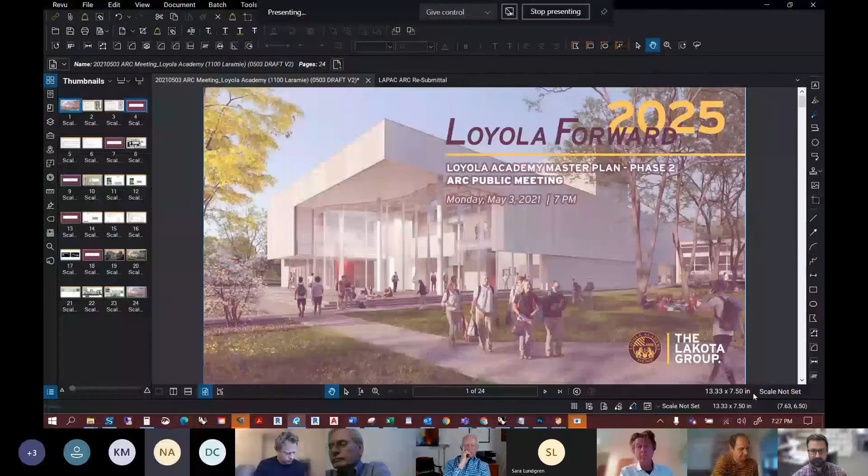Not sure who's going to be kicking off the presentation for the applicant, but they could introduce themselves. That would be great. Hi, my name is Dennis Stonquist. We've been in front of you before and glad to be back. Thank you everyone for the time tonight. I may not have wind or trains in the background, but I do have 2 kids and 2 dogs, so I just want to put that out there right now.

I am grateful to be here with Sara Lundgren, who is from Krueck Sexton Partners, who is our lead architect. We have made a few very small modifications that she will clearly explain to you, as to why and why we think they work.

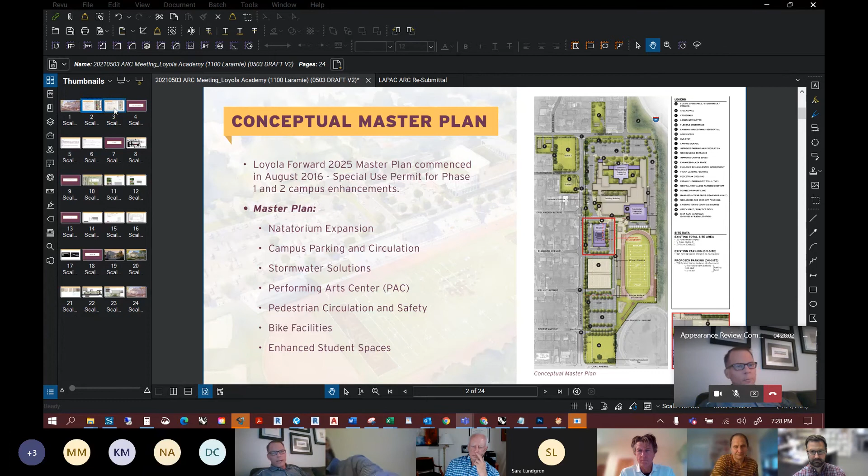We've started construction with our foundation permit, and there is now digging in the backyard in the quad section at Loyola Academy, with our plan to be open in the fall of 2022 for the 2022-2023 school year, with a theater and performing arts center that we believe is key not only to our experience, but the beauty of our campus. It is going to make the quad more usable. We've explained this before, but this is something we need on campus, and we believe it will be a bright spot for the Wilmette community with a 550 seat theater.

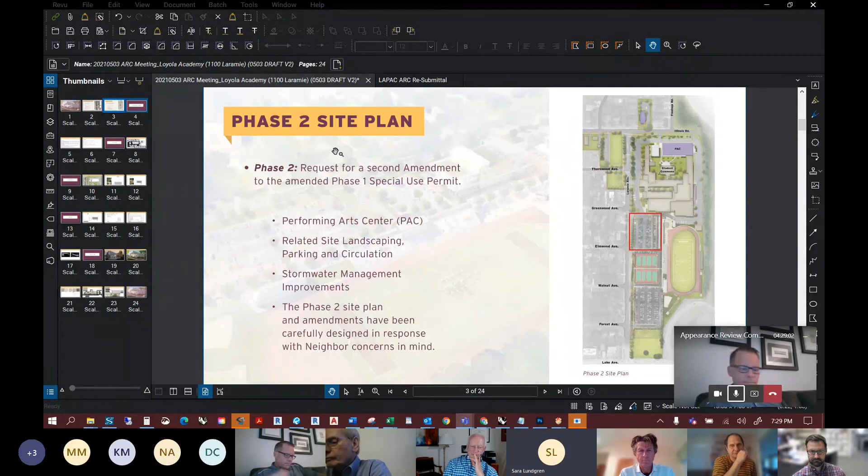I will turn it over to Sara Lundgren, who is now a partner at Krueck Sexton Partners. Congratulations, Sarah, and she will lead you through the specifics. Thanks, Dennis. Thank you everyone for having us present today some of the changes. We really appreciate your time.

Regarding the questions, these came through in the review of the building permit. Quickly, just to go through these, and then I can show them on a site plan and also in some renderings and various images that we've created. There were some changes to the stairs at the terrace level upon entry, both from the quad and from the drop-off. There was a change to the hardscape and an introduction of some aggregate. There was a change to our mechanical plant, which we can show on the plan, and a change to the fencing around it.

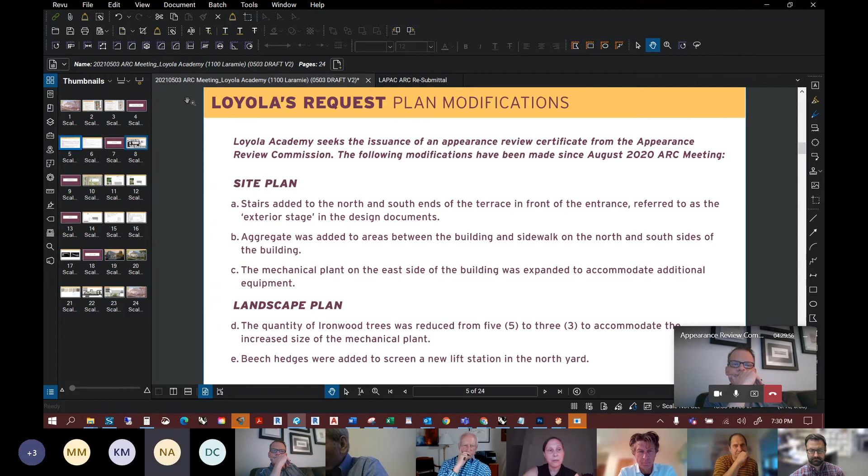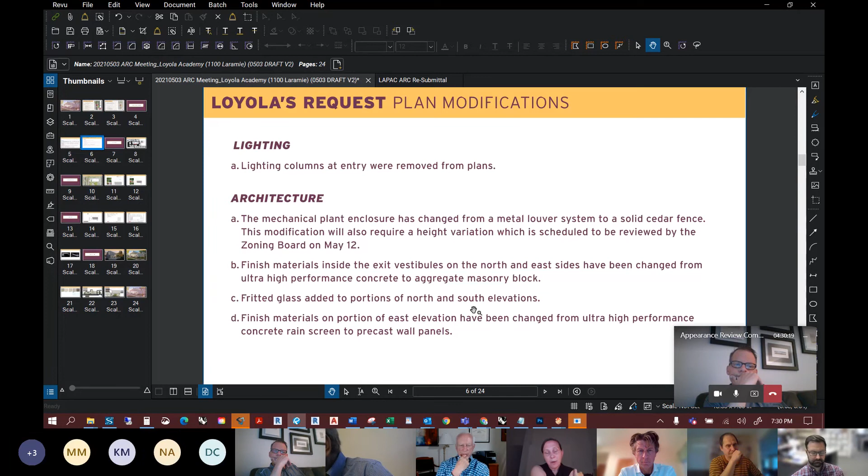Some trees were also affected, both at the mechanical plant as part of the site plan items, and also at the lift station in the front of the property. There were some lighting columns that were removed that you had previously seen in our previous application. From an architecture standpoint, the mechanical plant, with this fence enclosure, some material changes in some vestibules that can cut into the building, and then a clarification on the glass specification, as well as a clarification on one material on the quad side.

So to show you all of those things in a site plan, we put this together to make it a little bit more clear, and I can go through each of those.

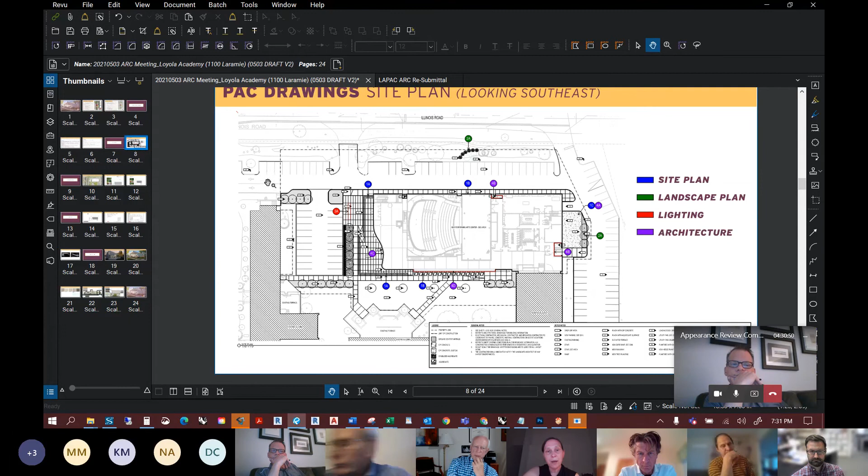For those who are not familiar with where the property is, it's at the north end of the campus along Illinois Road. The entry to the Performing Arts Center will be along Illinois Road or up through the parking lots to the west of the campus. The current east wing, along I-94, is this dashed area. And the new Performing Arts Center is at the very north end of that east wing.

So it kind of rounds out the campus. This parking is all existing to remain. It's getting slightly repaved to create a new accessible drop-off entry here. One of the first items was a change in the hardscape where we extended the steps that ran along the front. Previously, there was a retaining wall here, and we made the steps return back to the building to create a more gracious entry.

Similarly, on the quad side, we did the same thing. We used to have a retaining wall here. We returned the steps to provide for a future and better connection with the quad.

The second item, which is 1B on your agenda of items, is the introduction of some aggregate. So I would think about this more like stone fines or cobblestones, pebbles that would be fill-in. It would be hardscape that allows for water to drain through into the soil. There's a sliver at the north side between the sidewalk and the building that you'll see on a rendering in a little bit here.

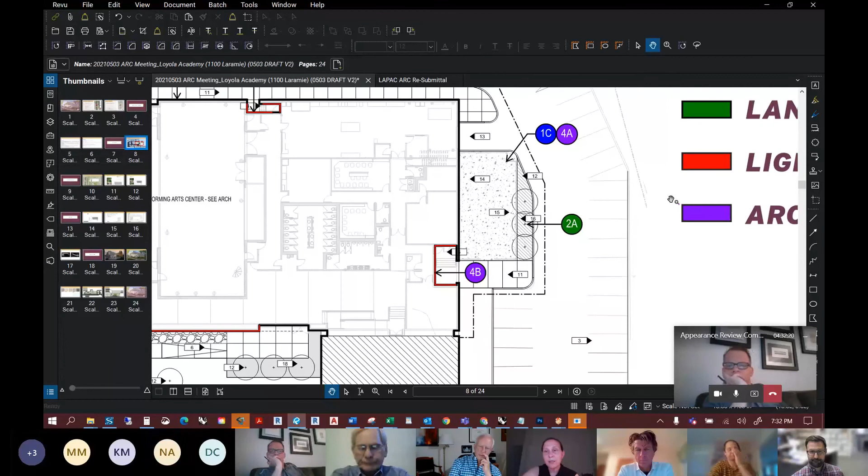And this is the chiller plant. It's on the far east side of the property, putting it directly next to essentially I-94. It is the location for an adiabatic cooler, some transformers, and other small equipment.

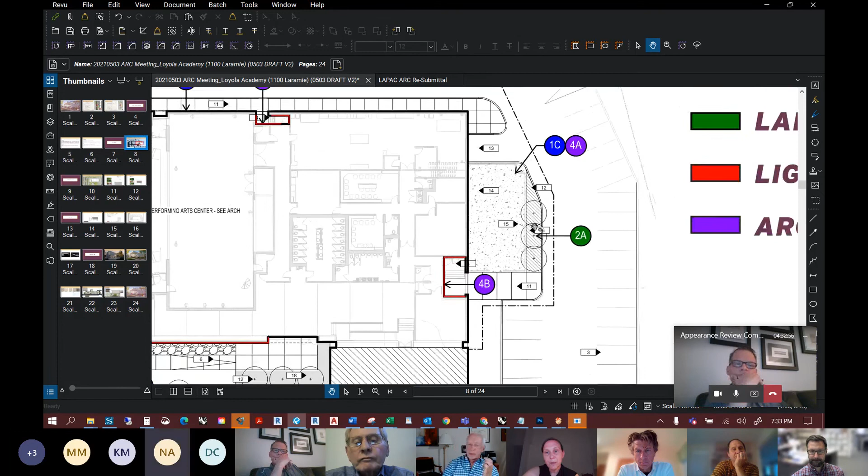As we went through our design, development, and construction document phases, this got fine-tuned in terms of the clearances that were required around the equipment, and it took up a little bit more space than what we had previously planned. So the outline has slightly gotten modified, and we lost 2 of 5 trees for a total of 3 trees in this area. That also relates to 4A, which is a fence at this location.

You'll see this basically an elevation of this fence. The fence is acoustically designed, so it is a solid cedar fence with an acoustical insulation on the interior face, working together along with the height in order to reduce any noise that's coming off from the equipment.

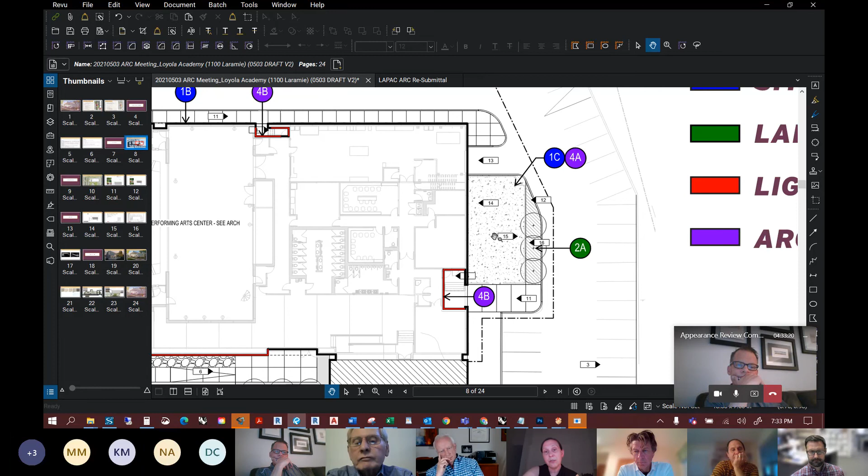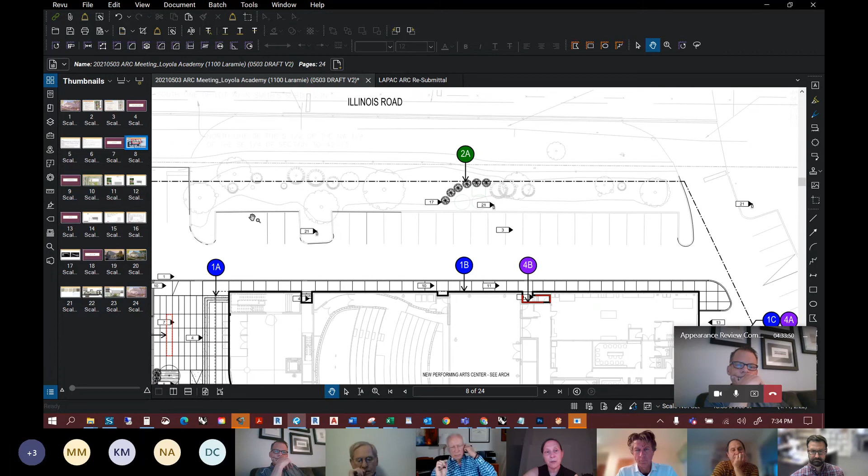Additionally, since I talked about the tree here, I'm going to continue with the landscape. So the other thing was that we introduced a hedge here. There is a lift station right at this location, and we wanted to add some landscape into the existing relatively heavily dense landscaping here in this portion of the property, just to shield that lift station, which shouldn't be visible at all through the fence. You'll see some images of the landscaping.

We removed 3 light columns that were placed right here that were previously approved.

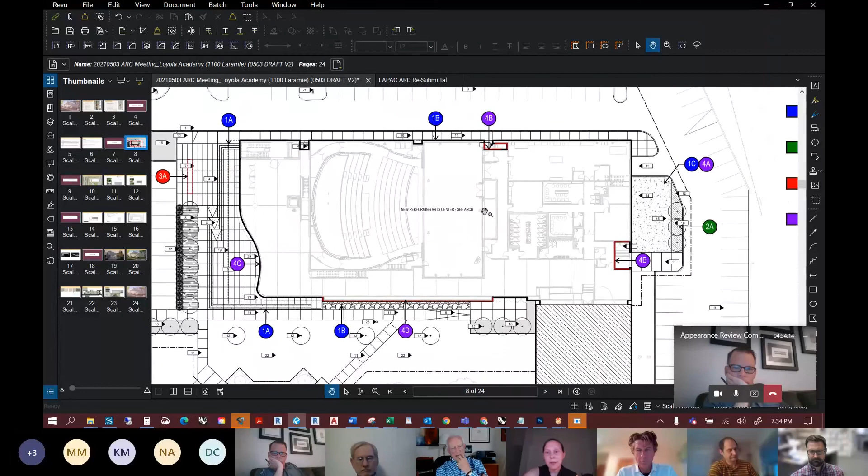From an architecture standpoint, there's 3 major things. One is we changed the material that I had mentioned in these alcoves here, and this one also here. It used to be a concrete panel system, and we changed it to be concrete masonry units with an exposed aggregate.

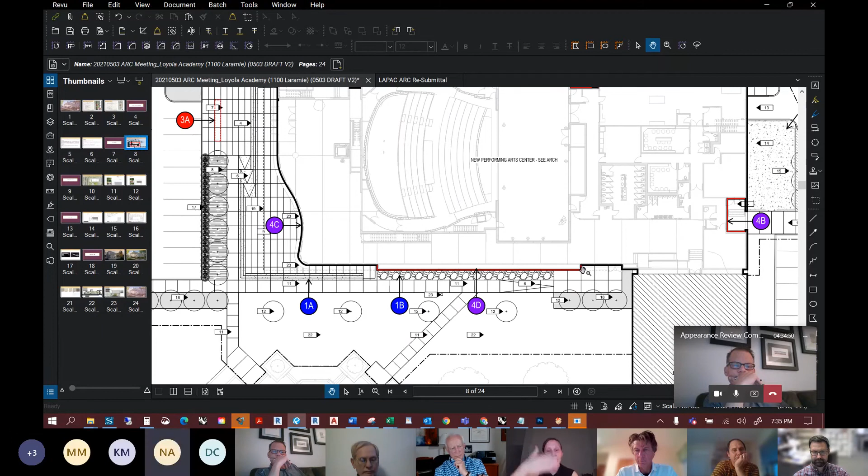The second thing is that this is precast panels. You'll see this in one of the renderings. Rather than have that be a rain screen system, we wanted to tie the materiality of the building together so that the mass of the theater house and the fly tower kind of returned again and became the base of the building. So I'll show you that.

And then the glass throughout the project has been designed to have a light frit pattern on it. So I'm going to walk you through images of each of these. Here you can see the hedgerow at the lift station and the trees over here at the adiabatic cooler plant. You can also see in this rendering the return of the stairs again on both sides.

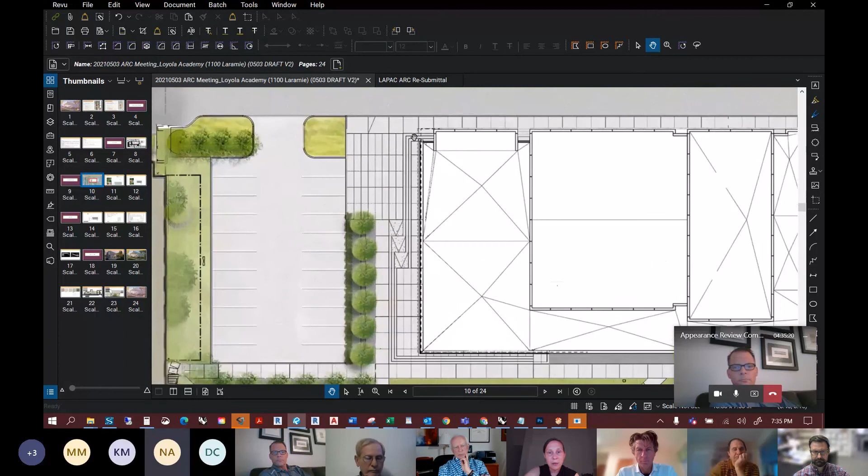In terms of the landscaping, the hedge along the lift station on Illinois Road will be a dense hedge that integrates. It'll be a deciduous tree so that it turns colors in the fall.

The trees on the east side of the adiabatic cooling plant have not changed. This is the same spec we had before, which is ironwood. We just changed the quantity of trees.

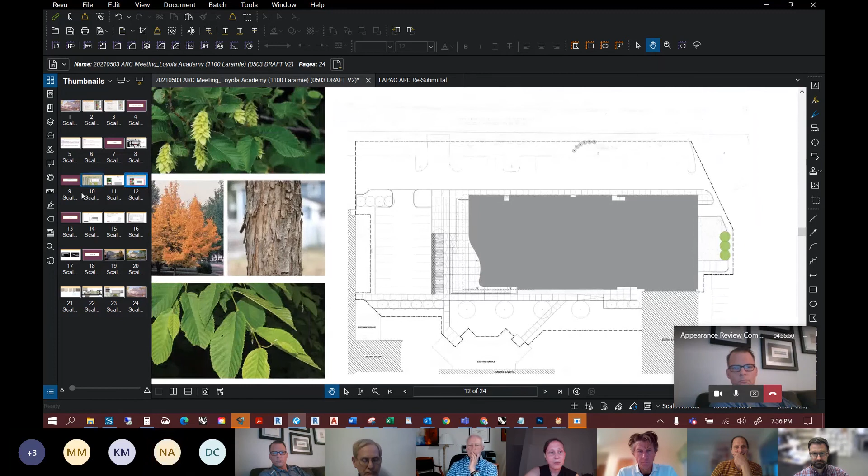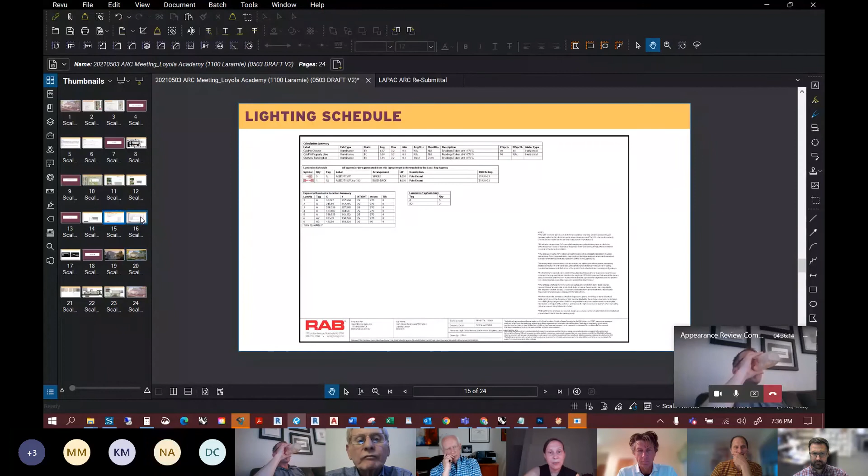From a lighting standpoint, all of the site lighting is the same. We re-showed this slide so you could see that was all maintained. It matches the rest of the parking lots on Loyola's campus, both in height and fixture, but we took out a couple of those lights here. This reinforces, in the submittal package, the light levels on campus without them, and specifically in this area of the entry, we're getting plenty of light.

Lastly, I wanted to walk you through some of the architectural renderings. So this is a rendering from drop-off.

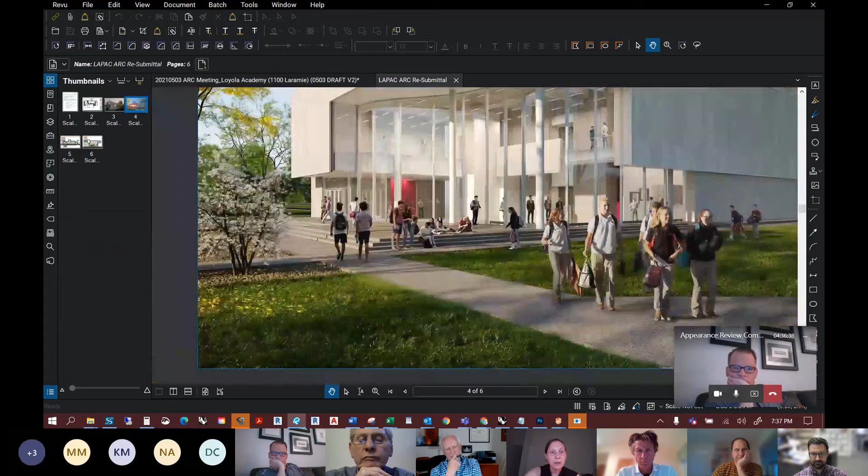If you zoom in, I actually put in two other higher resolution images because we couldn't send Lucas these high resolutions. You can see there's a little 6-inch pathway trough of aggregate that we think is a nice touch as a transition from hardscape to building profile along that north edge. We also have it on the south edge, but I don't have a good rendering of that.

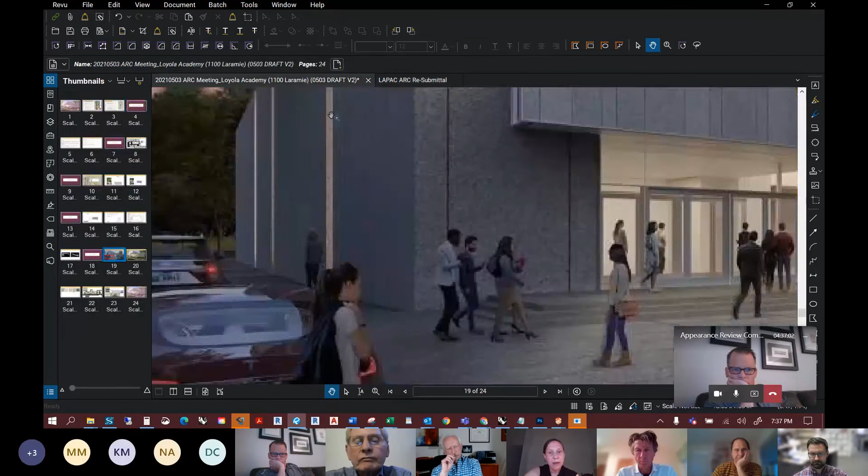We also have this, which is hard to see in this view, but in the next view you'll be able to see it right here. The frit pattern is a very light white dot pattern, which I'll show you an abstraction of in one of the elevations.

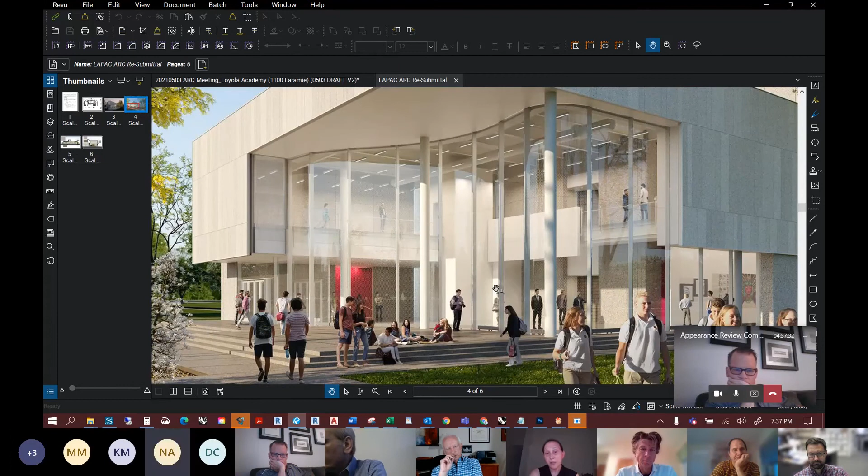We really want to keep this very open. The whole goal of the front stage is a seamless continuity between the interior of the lobby and the exterior stage. So the frit for us was a way to achieve a little bit of a dappled impression on the surface, but also still keep it very transparent.

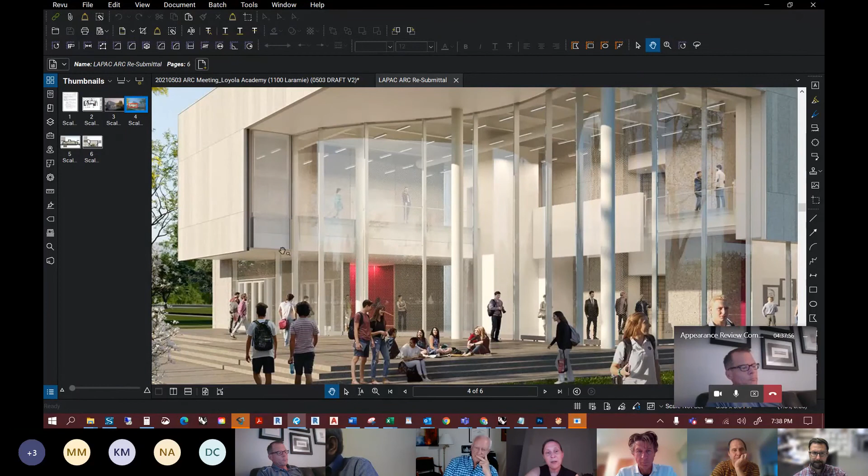We do have two different frits for the glazing. There's a denser frit at the shadow box areas of the slab. This was called out in the permit application as a spandrel panel, which I think was maybe a little misleading. This actually is a curtain wall system, but these panels allow transparency through to the steel beam beyond, so you can really see how the building is put together, and that has a slightly denser frit.

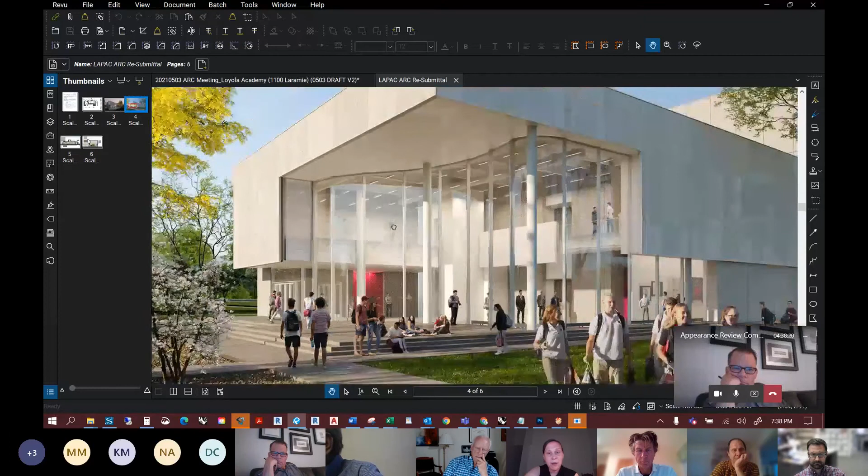That's what was being called out in this location, and then in the head location on the north elevation, which I'll show you now. So that is on this elevation. At the top of the glazing and at the very bottom, where you can see through to that structure, the glass acts a little bit more like a veil.

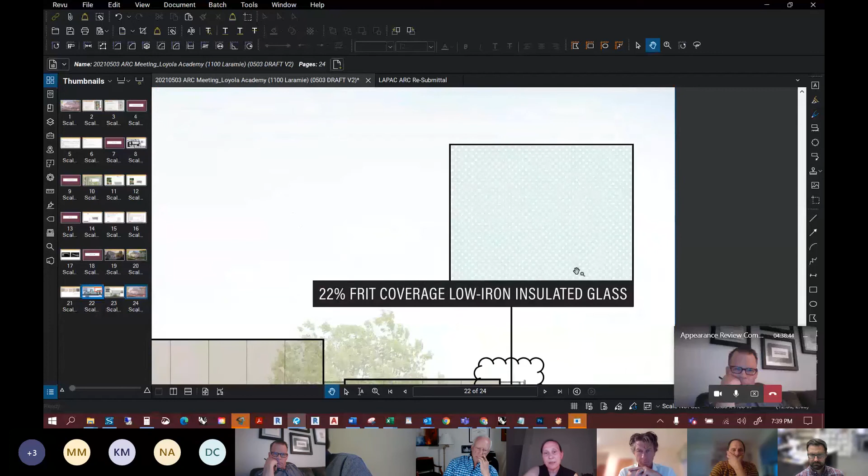The typical glass has a very light frit on it, and the glass in those locations is slightly more dense. We still want to be able to see through to that structure, but we wanted it to be a little bit more veiled.

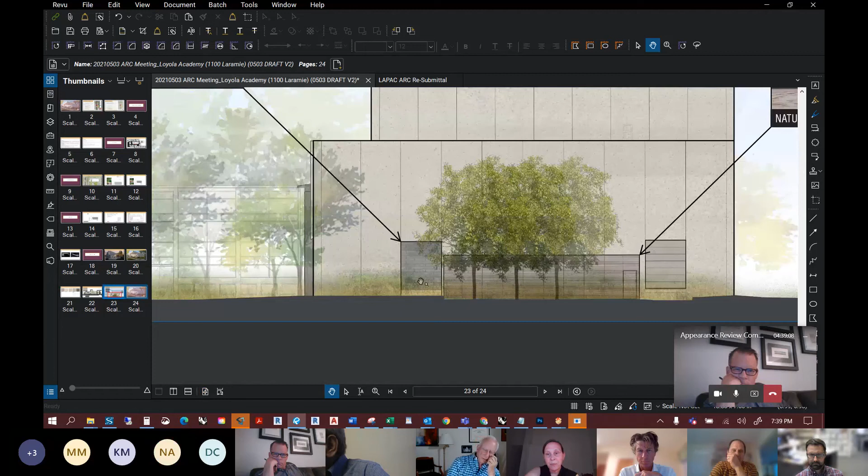These elevations also show the aggregated block in this vestibule here, and also on the east side in this vestibule here. You can see the coordination of the block to the sandblasted concrete that we have as the structural components. And then the last thing is this wooden fence, which is really a horizontal board, solid cedar fence with this insulation panel behind it that I mentioned earlier.

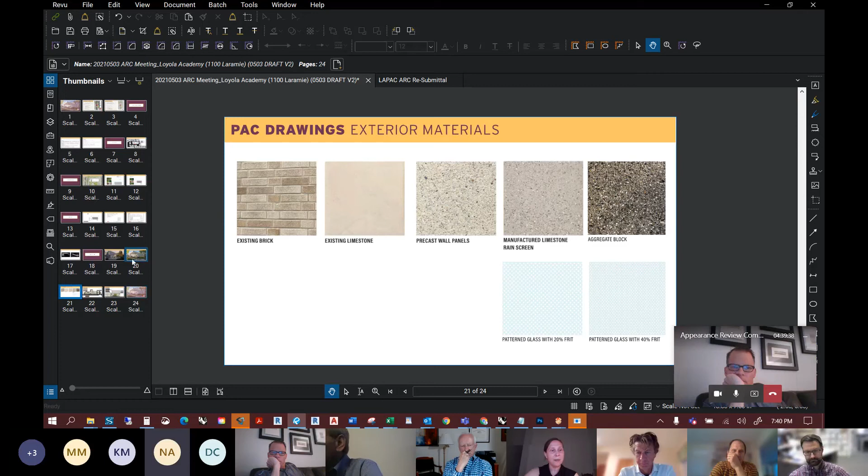Let me see here, this is the other drawing. I think this shows all the materials together, and I believe that touches on everything. I don't know if there are any questions about anything else I didn't touch upon in more detail.

Oh, actually, now that I'm looking at this, I do see that this is the precast wall panels at the very bottom of the rain screen system, which matches the tower and the theater house, which you actually can't see in this rendering, beyond, and the north side of the building.

The other panels here are the rain screen system, the manufactured limestone rain screen system. Thank you, Sarah.

Does that cover all of the points? I think it does in your submittal. Okay, what I'd like to do is go around to our commissioners and give each an opportunity to ask questions.

Jeff, I'd like to start with you, please, if you could unmute yourself and if you have questions for Sarah or Dennis. Welcome back again, and it looks really good, I like it. I guess the only question I have is with the introduction of the cedar fence. It's such a strong, heavy material with the precast and the aggregates, and then the cedar fence rather than the corrugated or metal or what it previously was. I guess to me it feels a little out of place, but maybe a little more conversation about why cedar.

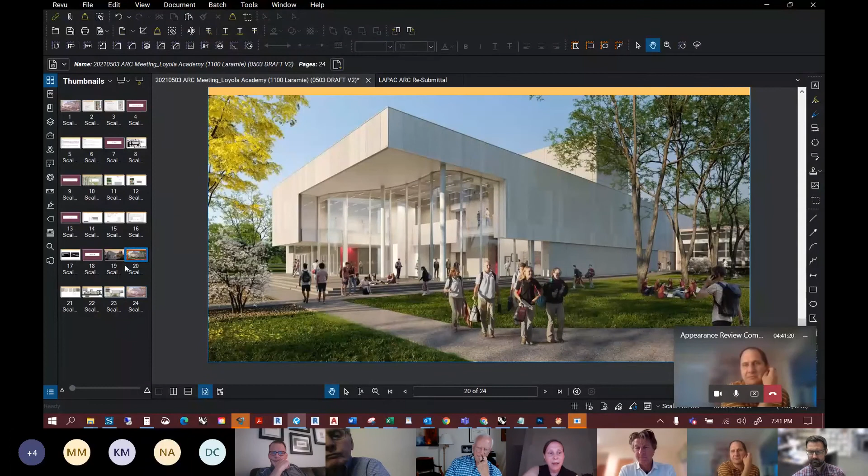Yeah, I think we were trying, going to that elevation there, to balance out value and aesthetics. For us, the natural cedar is a really nice complement to the rest of the building and provides, with this insulation, a type of system that we can make feel monolithic. There's a door, so we need access to the chiller plant, and the best way for us to detail out the system, with the priorities we had for the project, was to use wood, where we can really use it as the door panel. It's completely monolithic, and it becomes a nice backdrop to the trees that are just in front of it. So that was our thought process.

I don't know if you're alluding to the idea of possibly using the same precast panels for an extension off the building. I think that's an interesting idea, but I think we've been trying to hold these volumes tight. So we were thinking it was a nice complement and architecturally cohesive to have the fence be more monolithic, which we could achieve with the wood.

Is there any precedent anywhere else on the campus? I'm just trying to... that wasn't our inspiration. No, I know, I'm just... I don't know. I know it's facing the highway, no one's really going to see it, but we're looking at all sides of the building, and this is to me a little... I guess I haven't completely figured it out. So that's my only comment with that piece.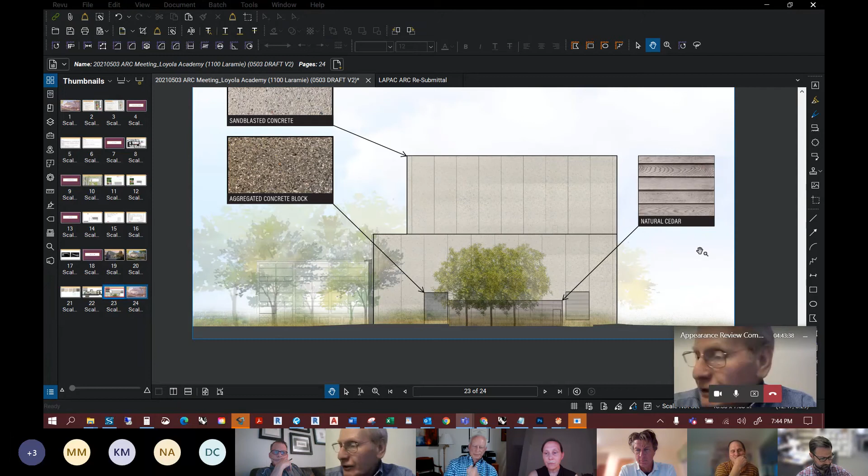Okay, thank you, Jeff. Richard, are you on the line, able to ask a question? I should be unmuted, I trust you can hear me. Yes. I think the presentation and this 24-page packet are very comprehensive, explain things well, and I don't really have any questions beyond this. It seems it's all buttoned down and looks good.

Okay, thank you, Richard. Doug. Yes, thank you for this package. I have to say, I think the stairs and the changes you've made to the front are beautifully designed. I think they're going to work very, very well.

The north elevation brings to mind a question I had before, and I think it answers it, but I want to check, and that's the intensity of the columnar lighting. It looks good in this rendering, but I've kind of had a concern that it could be bright if it's not managed well and take the focus to an odd part of the building. There's no way I can evaluate it because I can't really visualize what the actual lighting would be.

Are you commenting on these gaps in the system? Yes, because I like that, but I think they could be pretty intense if you're not careful.

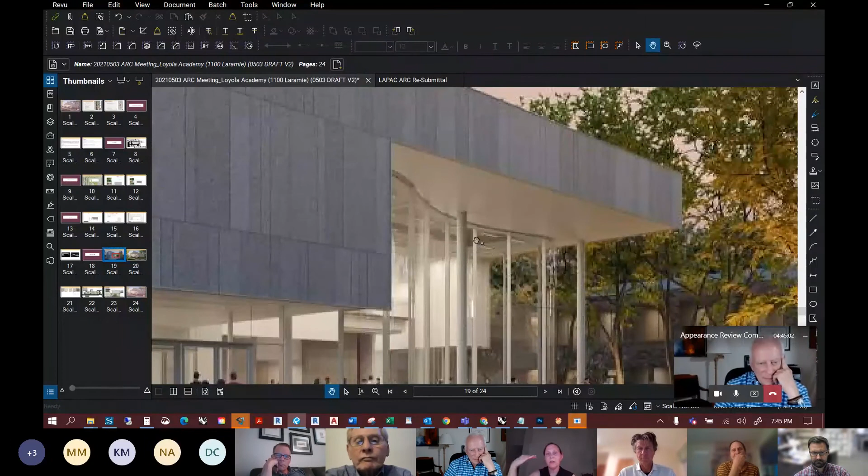You know what we can do, which I think is a good idea. I don't have an RCP on me right now. These are not going to be specifically lit, so it will come from the lighting grid that's happening at the ceiling, you can kind of see it here. It gets a little fuzzy in the rendering, but basically there's a grid of linear lighting that happens in this plane, they're relatively far back. I can pull up an RCP if you want to look at it, but I would be surprised if it's this light, and I can talk to our lighting team to see what the options are for putting the ones on the end if we think we're going to get too high a lighting, on a different circuit.

I'm not really sure about that yet, but it's something we could test. I think a different circuit is a wonderful solution because then you can modify it. And I do have to say, I guess I don't object, but I do think the cedar is kind of odd. So anyway, those are my comments.

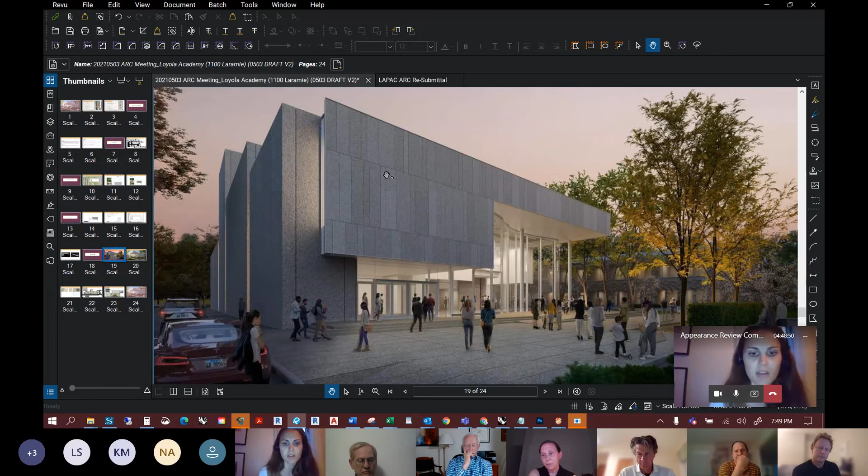I concur with everyone else. I'm excited to see this project progress. The only question I had was with the Frit glass that is specified, will that deter birds? There's quite a bit of trees surrounding that curtain wall system. I wasn't sure if that was something you had looked at. There's trees, as you can see in that image we were just looking at, in front of the plaza, and you can see them right here too. The Frit is expected to help with birds. I don't know if there's anything scientific about it, but there's an anticipation that it would help. Great, that was my only comment.

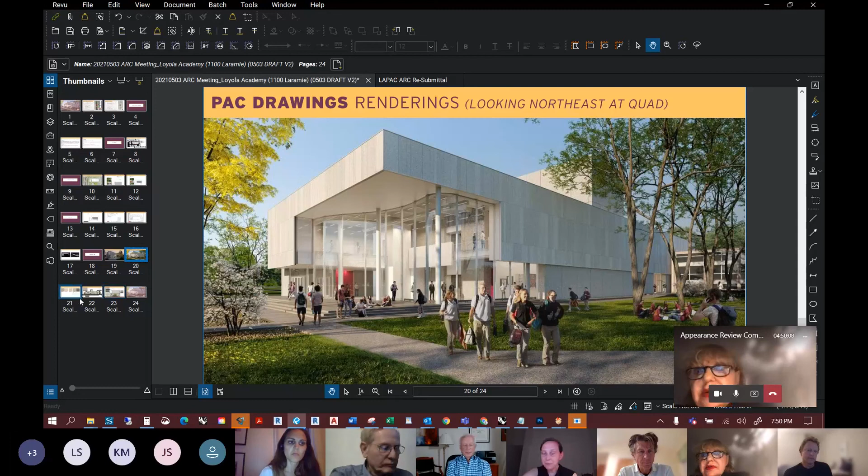Yeah, there's three different types of concrete, if you thought of concrete in the broadest picture. Should we look at the elevation? What would be most explanatory? Which elevation would you like to look at? Whichever you think will describe all of the finishes.

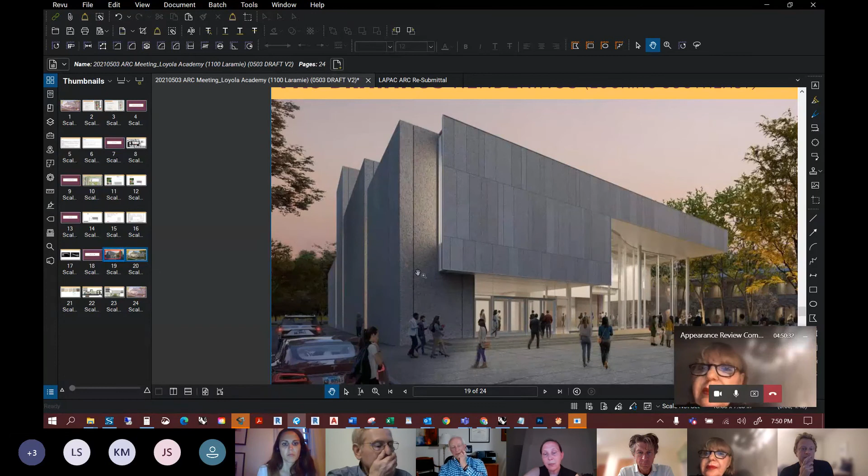Okay, so let's start here. There are four volumes here that you can see: the back of house, the fly tower, the theater house, and the north stair. Those are all precast concrete. That precast concrete basically looks like this — it looks very similar to the limestone on campus. It's sandblasted, so it has this very soft kind of subtlety to it. In addition to those volumes, you can see the fly tower volume here, and these bottom panels right here along the quad.

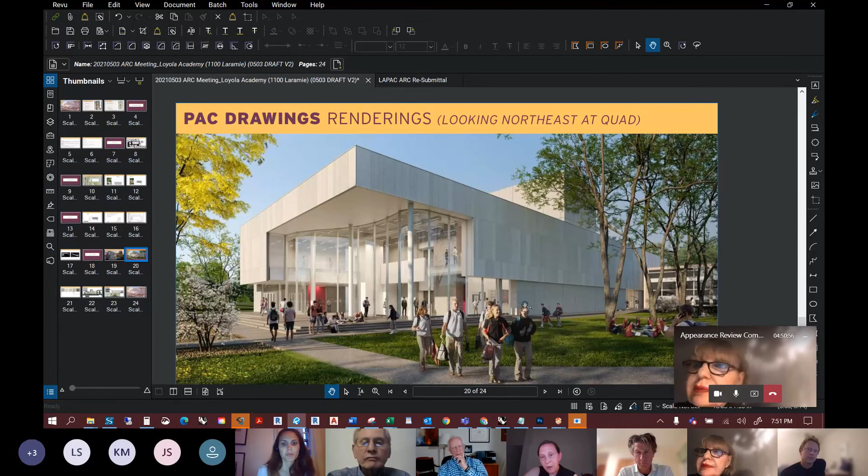Wrapping from the north side all the way over to the east wing is a rain screen system made of ultra high performance concrete, fabricated to look like limestone. We've been working on samples to extend the vocabulary of the precast. You can see a slight difference using two different textures on these panels—one is more like a bead blast, and one is more smooth, with a couple of different runs, giving this subtle variety of texture on the rain screen. This literally functions like a rain screen, a very lightweight system with metal edging to match the materiality.

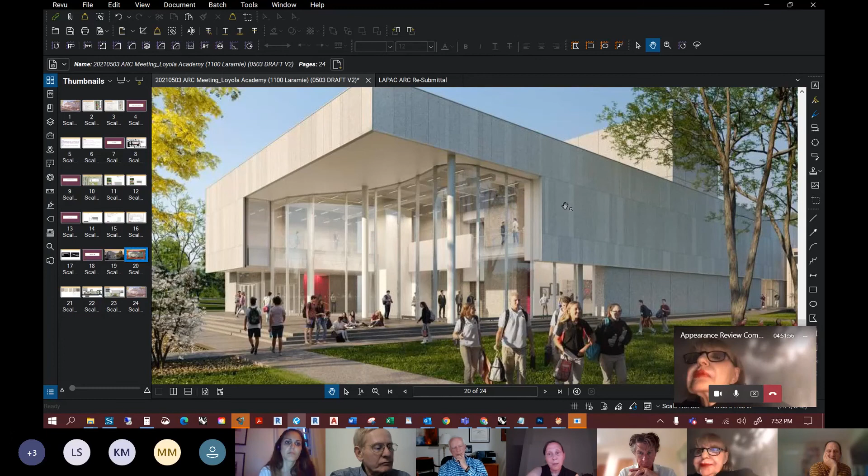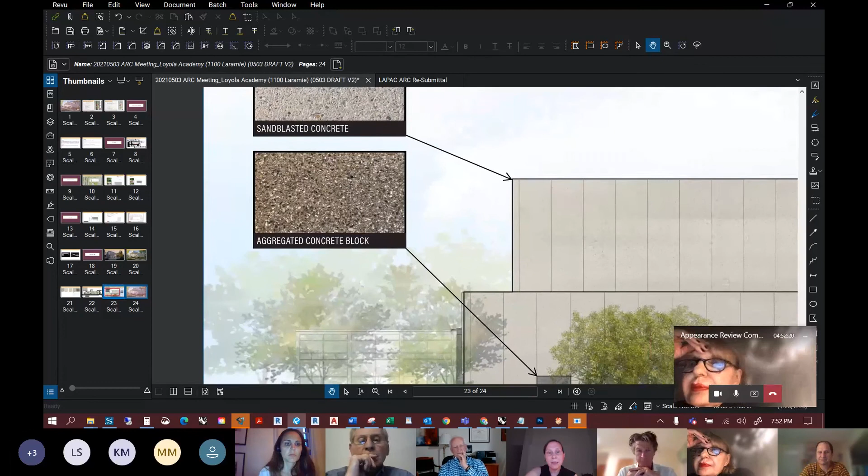In each of those alcoves—there's one alcove here, an exiting alcove from the crossover behind the fly tower, and another alcove on the east side, an exiting alcove from the back of house area and mechanical rooms—inside is an aggregate block, slightly darker than the precast, but also in shadow since they're cut into the building. So those are the three types of concrete we have on the building. This elevation shows a system of joints.

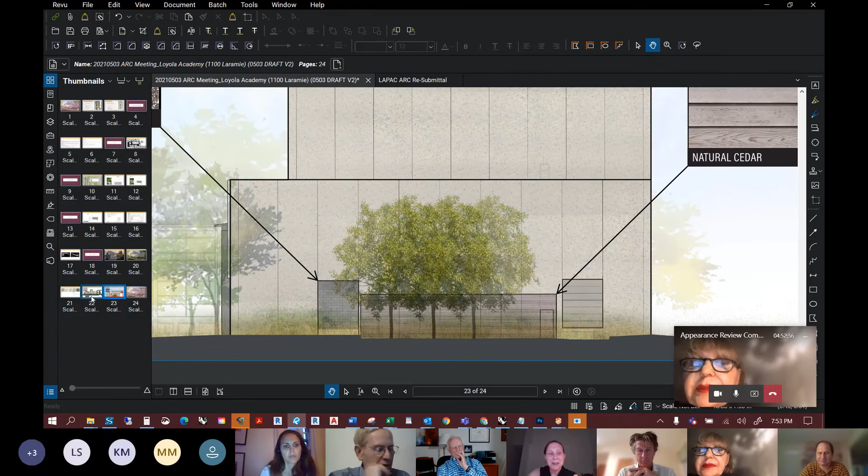What is the size of the precast panel? The precast panels are approximately between 9 and 10 feet generally. The fly tower panels are also generally between 9 and 10 feet. These panels coordinate on the grid—I think these are 9'6", and I think these are 9'6", and I think these are 9'3". They're slightly smaller to get equal size panels on the smaller volume.

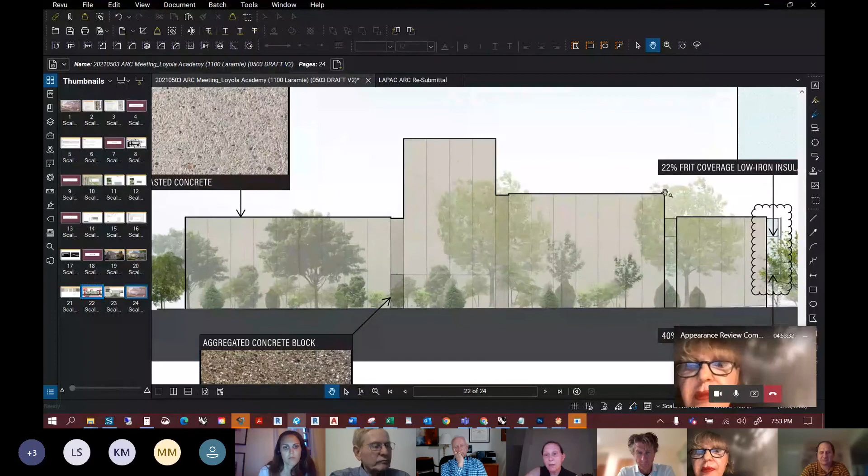And how are you doing the joint in between—what's the size of the joint? The joint is 3/4 inches wide and a raked joint; we want to express the panel. And how are you doing a butt joint vertically? All of these are full height panels except for one joint in the fly tower, which will also be raked. We're trying to express this line throughout the building—it comes and goes, but they will all be raked.

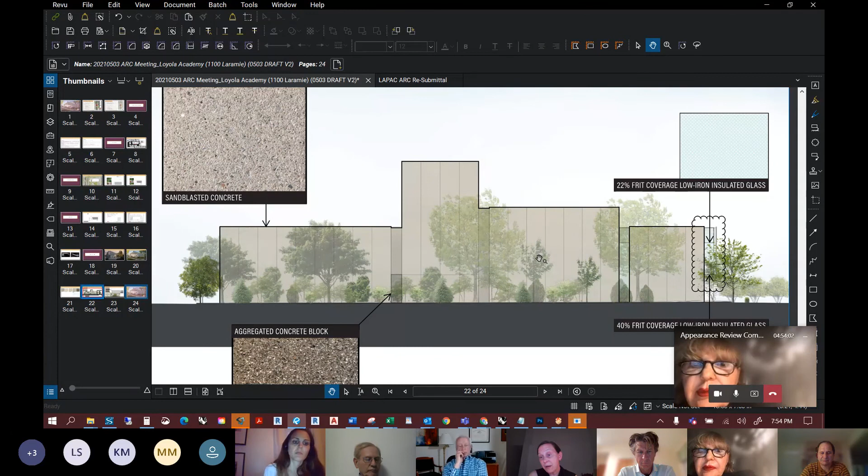So do you think there will be enough legibility in the rake joint, similar to what the drawing shows? Yeah, I hope so. We have some ability to express that a little more through the color of the caulk. I think we do have a mock-up planned where we can look at the joint sizes, but these are huge panels. It's our intent to have the panels read so that the masses have some kind of pedestrian scaled legibility to them.

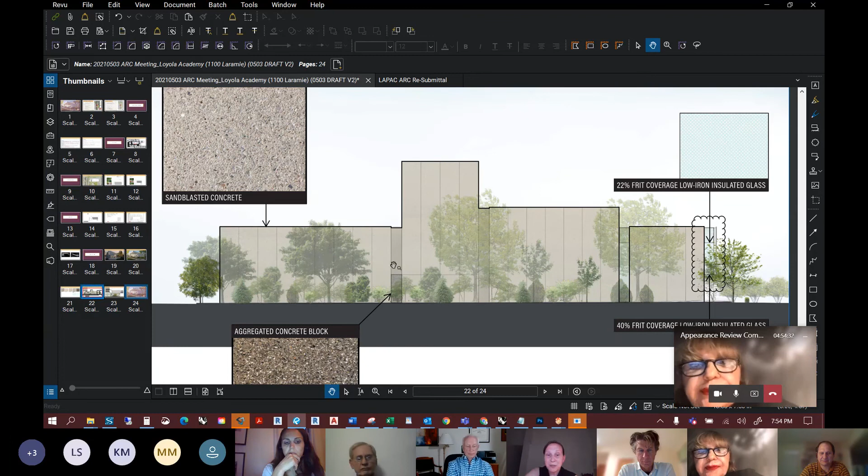Would you also tell us how you do corner panels? That's a great question—let me see if I can show the best example. We took a lot of care to make sure it didn't look like just any other precast building. Precast naturally, for an R value higher than 20 or 25, is a 12-inch thick precast panel. We wanted to express it as a thicker panel, so every corner returns and has a 24-inch leg on it. That's what you're seeing here—we have 9'6" wide panels, but the corner panels are 9'6" wide by 24 inches deep, an L-shaped panel so we can get this series of thicker panel volume reading as the building marches back.

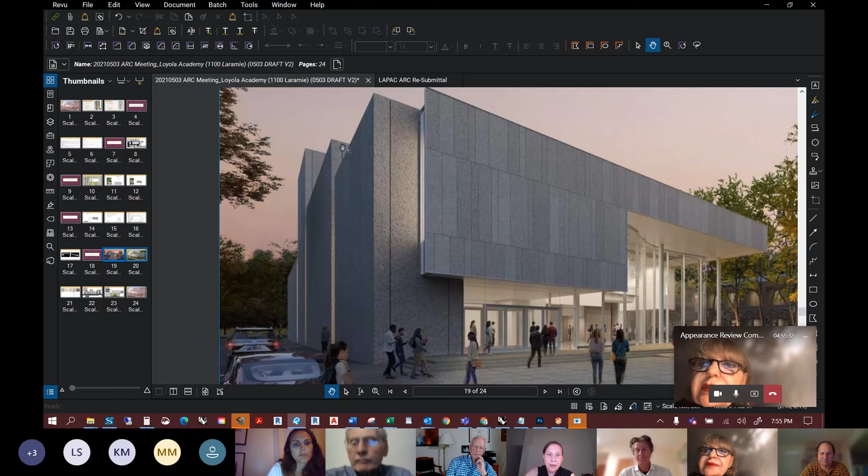That joint is the exact location where, in plan—this is going to be hard to see—we have a step back condition where we recess another panel so you really get the reading of these four distinct volumes. That's exactly where that joint happens, where the panel recesses back. And that corner is a 90-degree corner—the two surfaces meet at 90 degrees.

Yes. Is it slightly rounded, or how are you solving the sharp corner edge? Yeah, that's a great question. Of course, at all of our joints, we have miters.

I haven't looked at that detail yet, we just literally got the precast shop drawings, so I can't answer that, unfortunately. Yeah, thank you, thank you very much.

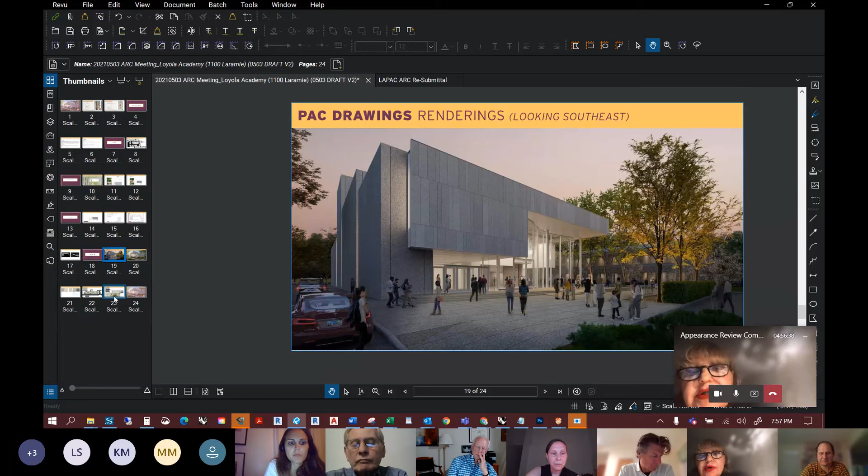Back to the cedar panel in the back. So it's done out of big panel sizes or 4-inch board sizes? Well, 4 inches high, only 4 inches. Okay, and are they butt joints? Yeah, they're tongue and groove in order to account for the acoustical requirements.

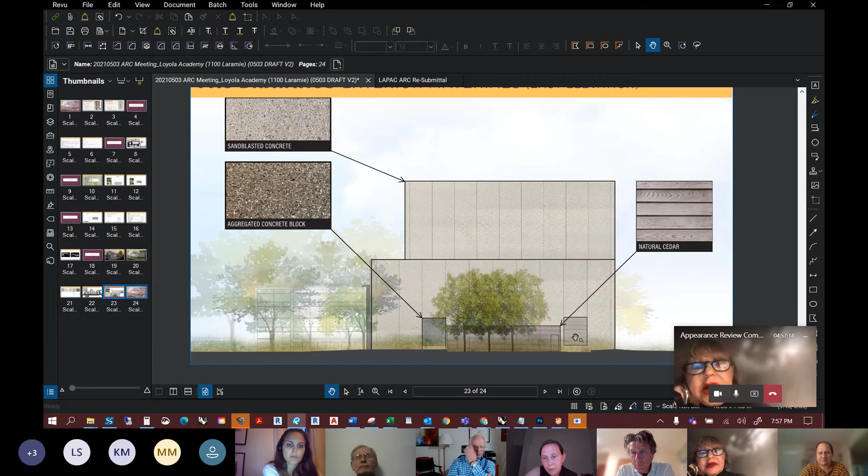So the acoustical treatment is pinned onto the back. It's like a quilted acoustic insulation that's pinned onto the backside, and it fits between. There are 4-inch galvanized steel tubes that are basically supporting this entire system, and so that quilted insulation basically fits between the tube and the cedar.

The corner is going to be kind of a lap joint, so it looks like it's interlocking. You'll see the end on one side, and then you'll see the face and the end and the face. Can't see that in this detail.

So looking from the side into the entire panel, what's the thickness that you experience? It's 1 inch. 1 inch? Yes.

What is holding it? They're mechanically fastened to a frame that connects it back to the galvanized steel post. And that's exposed frame, right? Yeah, actually, now that I'm thinking about it, the frame is exposed on the top. So if we were to run this vertically, which I'm not against at all, we could protect those ends, to the other gentleman's comment.

I do have that detail, if you want me to pull it up. Sure.

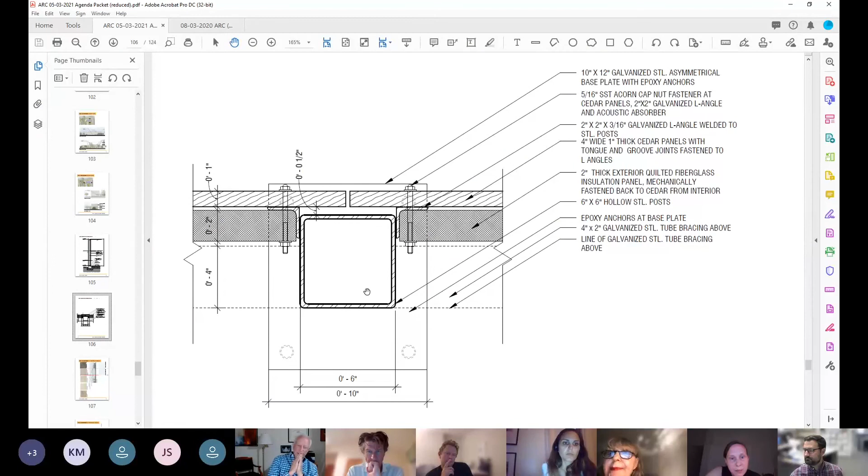So, do you see these angles on the interior, right there? Shoot, I can't point. Yeah, those right there. Nice. Yeah, so the idea was that those angles would be offset. We don't really want the wood touching the galvanized frame, so the angles are...

...to the system. I thought that there was a frame that ran around the top, but now that I'm looking at the section detail, I see that there isn't. So if that were a requirement, we would have to work through that. But really, the goal is, as I said before, to have it read monolithic.

The fasteners are exposed, and it's just a very, very simple gray textured fence that's going to be relatively, it's going to be the height of the adiabatic cooler so that it can work acoustically. I see that it is 11 feet tall. Yes, and that's the height of the cooler.

So I'm just thinking of that, and the entire structure, the construction and assembly that you made, I almost think it is more an interior scale than outside, and I feel it's a little bit too thin and without much substance. Not that we are looking for substance, but I am just thinking about the elements, about the snow and the rain and ice and all of that, and how is that going to behave over time. So anyway, these are just a few comments regarding that.

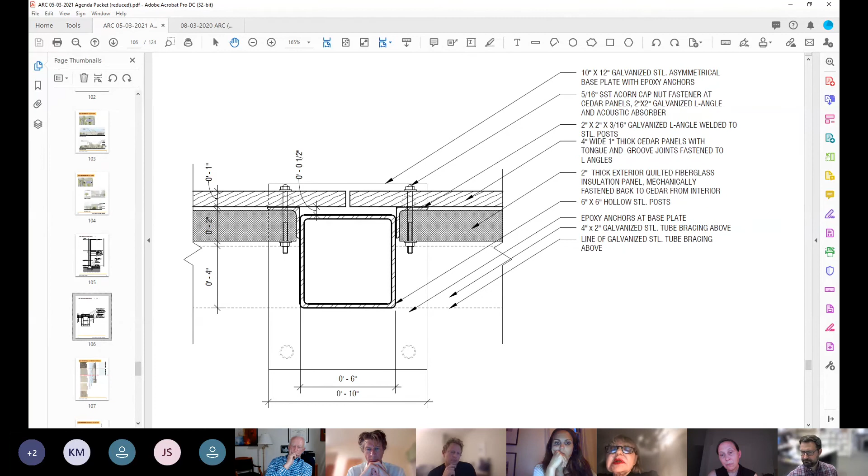I have one more question. If you would go back to the plan of the ground floor, please.

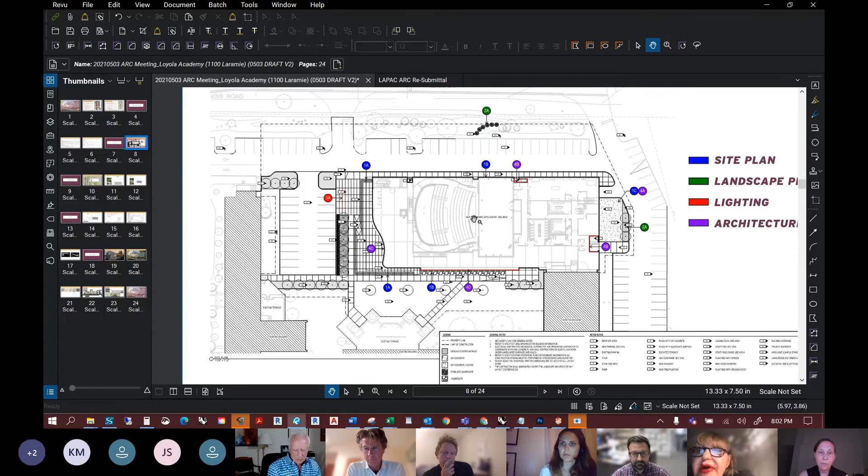So I was thinking that this is a beautiful entry that you created, very gracious, and what you have done with the stairs, being omnidirectional so to say, is wonderful. But I do have a small question on what side would that be, on the bottom of the drawing?

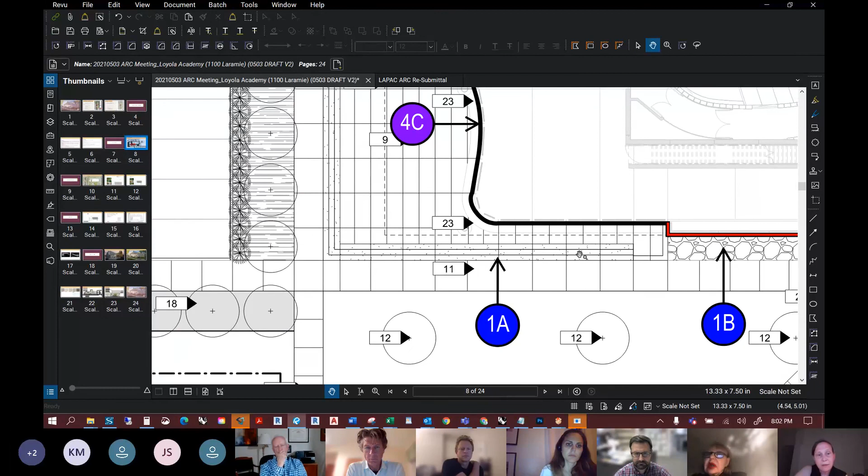Here, south? Yeah. What is the width of the circulation between the stair and the wall? Between this, you mean right here, the sidewalk, or right here? Stair, right there. What's that dimension? That dimension is, let me see here.

It's the size of... yeah, I think it's 5 feet. So that's our module, but I'm going to have to double check.

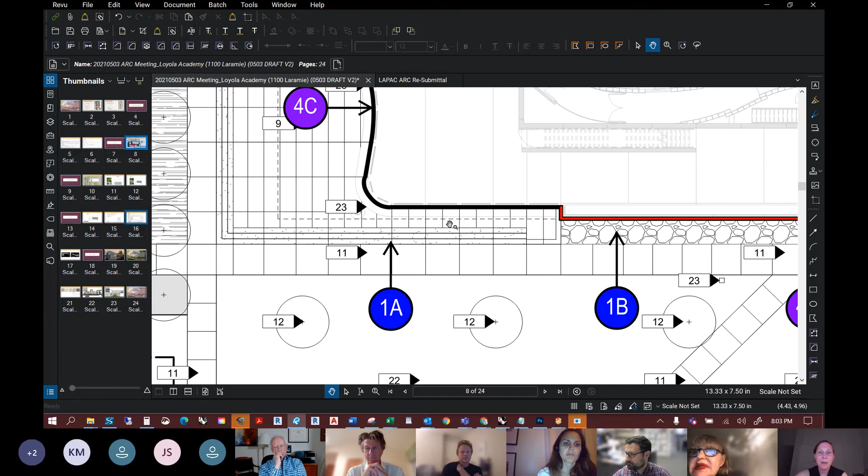I honestly don't know what would be the right solution, because I think wrapping around with the stair and inviting people to come up is great, but I feel that might be a little misleading—you go up this many risers and find out you're hitting the wall. There's no room for circulation, but if it is 5 feet, you can actually have 2 people walking, maybe one next to the other, but I think it's a little bit sensitive circulation.

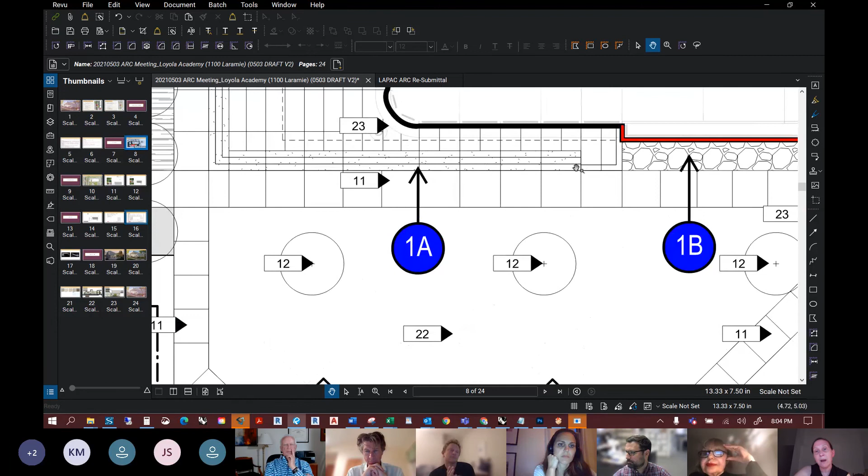100% it's sensitive, I completely agree with you. And in fact, this is where our landscape designers had started. Then we had your exact sentiments, which is why we had a retaining wall here. We actually returned to this because we were thinking of the future, when the big idea is that we have this second stage connecting the existing buildings together. We kept coming back to this idea of having almost an amphitheater where you have kids on both sides of a performance. So we're thinking of this more as a seating area than as steps, and we feel it's a really critical part of that center performance, which would ultimately happen here.

I would actually refrain from suggesting to any architect what to do with their project, but you may even start doing that right now—block it off and create seating that is in the same continuation. I don't know, what's the riser height?

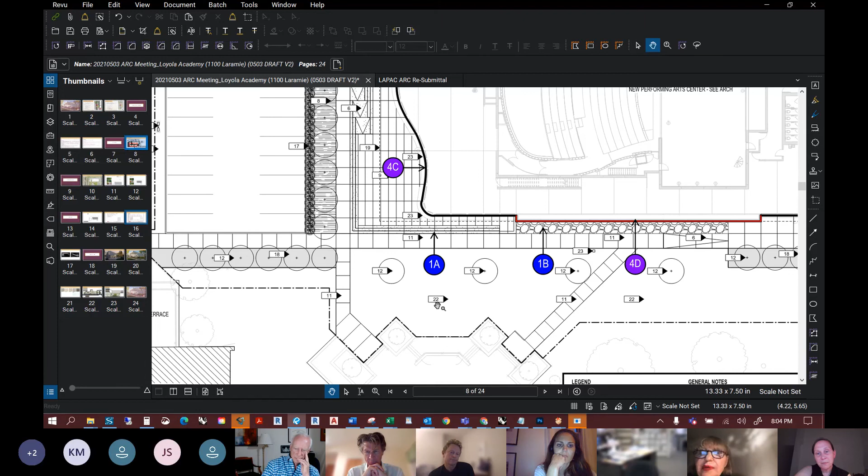It's a standard riser height, 6 inches. And so, sorry, what are you suggesting?

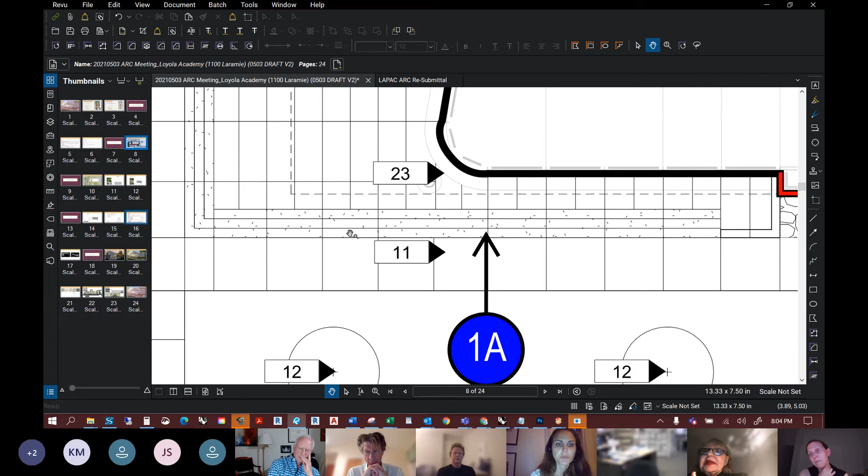No, I was saying maybe you can even recognize right, or something that turns it into the beginning of your amphitheater seating. Anyway, that's a minor point, but thank you very much for all the explanation.

No, thank you very much. Wonderful. I believe, thank you Nada, thank you Sarah. I believe we've had a platform for all the commissioners.

I do have a few questions myself, and first of all, thank you. You're getting these questions because we don't usually have the treat of having a beautiful piece of architecture come before this committee very often, so we have a lot to dig into and a lot to analyze and appreciate.

I am with my fellow commissioners in critiquing the cedar enclosure. I believe Mason is correct in saying it's going to look good for the first 5 years, and even if you go vertically, I would question that after that period of time. Picking up on Nada's comments, it seems to me to be somewhat of a finicky design where, in lieu of insulation and a frame and the cedar, you could have a representative precast concrete panel that would achieve the acoustical properties you've set out for, and it would be, frankly, more in keeping with the building.

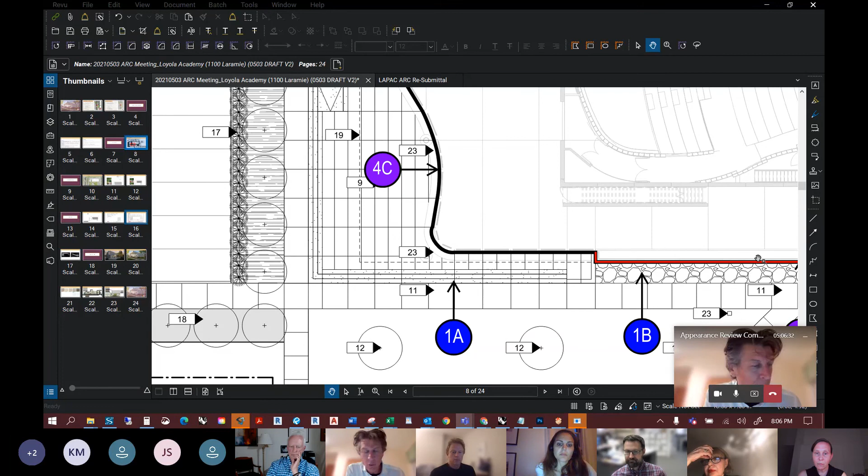That's certainly up to you, but I think that's the one part of the scheme that is a stretch, and everything else is incredibly well composed. I question, Sarah, have you worked hard with your engineers to ensure there will be no mechanical equipment visible on the rooftops? Yes, that is the last thing I want. I guarantee you that.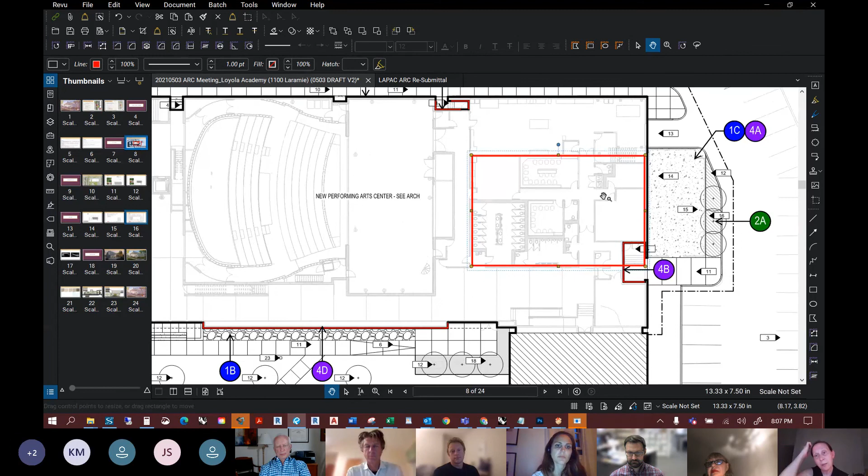I don't have the second floor plan here, but I'm going to draw a rectangle just for your knowledge—there's a mechanical well that happens from this wall to this wall. All of our mechanical equipment is up here, directly over this back-of-house area, and this volume and this volume are significantly higher. I think the height is 13 feet from this roof deck up to the top of the parapet wall that forms this volume, and we do that for acoustical purposes—we need these walls to be as high as our air handling units up there, and they are. It works.

We have no doubt that this is going to be great. Okay. Right, and I remember that well.

I was frankly even more concerned on the other flat roofs, just ensuring there are no goosenecks, no soil stacks, nothing that will penetrate the beautiful horizontal lines of the boxes and the forms. So I know you share that concern—it's just a triple check, as Nada said, by an outside architect.

Yeah, there are roof hatches that are required at the fly tower, and there are obviously storm drains on all of the roofs, but that's the extent of it. Okay, so yeah, nothing. Very good.

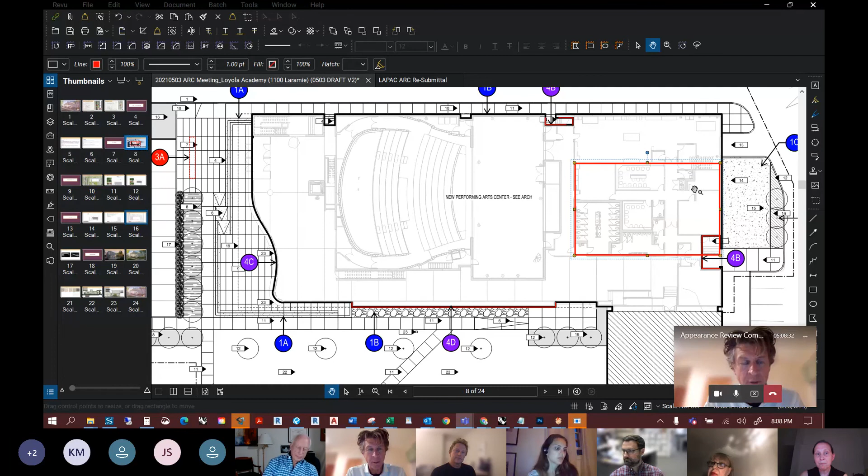You removed on 3A, you removed 3 lighting standards or poles. Could you go into that a little bit more? What's the thought behind that, and why the reversal?

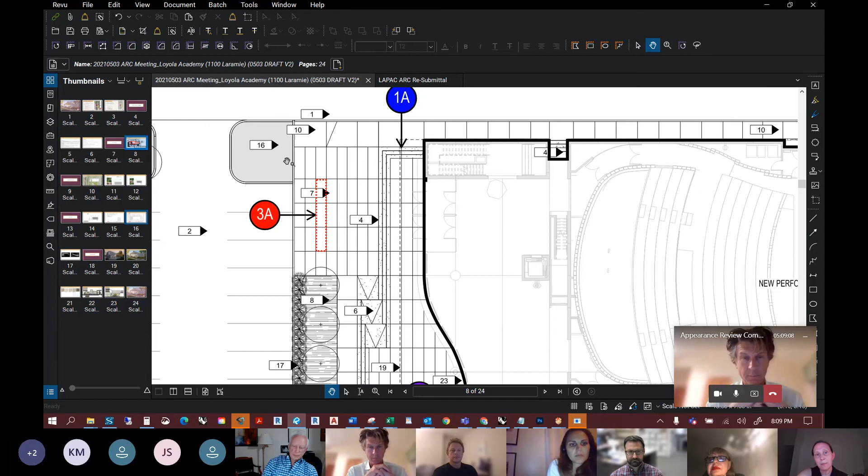They were more of a lighting design element, an idea of landscape design extending these trees up toward the entry. Loyola has been very specific about their goals to have universal accessibility on campus, and we felt like it was a bit of an impediment since we placed our accessibility ramp here as the connection to the handicap spaces over here. So we knew we didn't need them. We really liked the idea that the light was really coming from the terrace out at the front, and felt like this wasn't really helping at all, so we took it out.

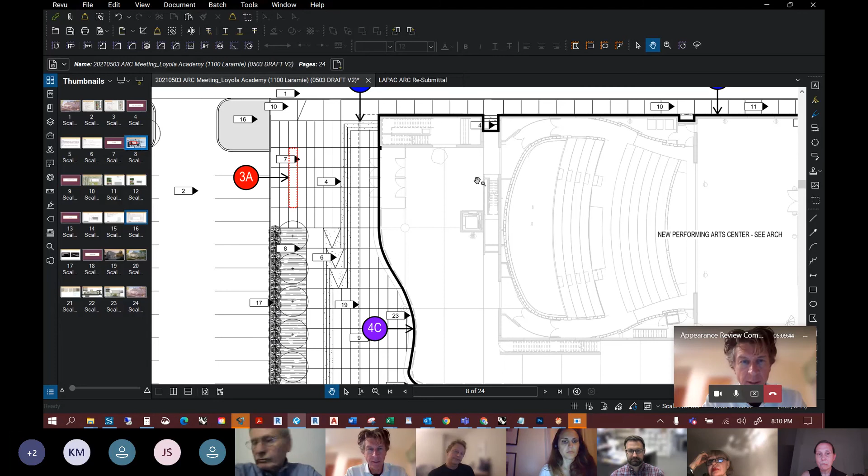No, I do like the decluttering of the site, so that makes sense. I just wanted to ensure there's not a drop off, because other than right next to the building, that's the second most area on the site that you would need lighting.

Yes, and we have completed these studies. You can see that there's enough lighting at the entry.

And then my last topic I'd like to address, picking up on something Devin already touched on, is the bird friendliness of the glazing. I don't recall in our first meeting how important that was, but it's become extremely important for us in the village, to the point where we have developments going on that we've really pushed hard on that issue. Part of the reason is that bird glass specifically is meant to be in place up to 36 feet from the ground, because that's what birds are looking for. They see a lighted source, and as if they're going down to the quad or to the ground, they will fly into those lighted sources. So I think it's almost imperative that we know the frit you're planning to use does have bird repellent qualities, as a specifically designed bird friendly glass would. Without that type of frit, I understand, but I think it's really important for the village to understand that.

So when you say without that, can you explain your request one more time so I really understand it?

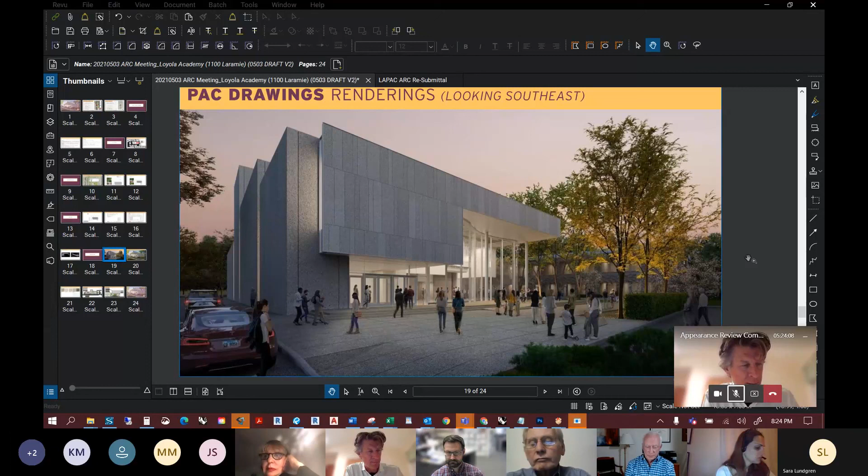One thing, Charles, that I would recommend, just because the commission could potentially be discussing this at the meeting next month, is that the commission move to continue the remaining items of this case to the next meeting. So, moved.